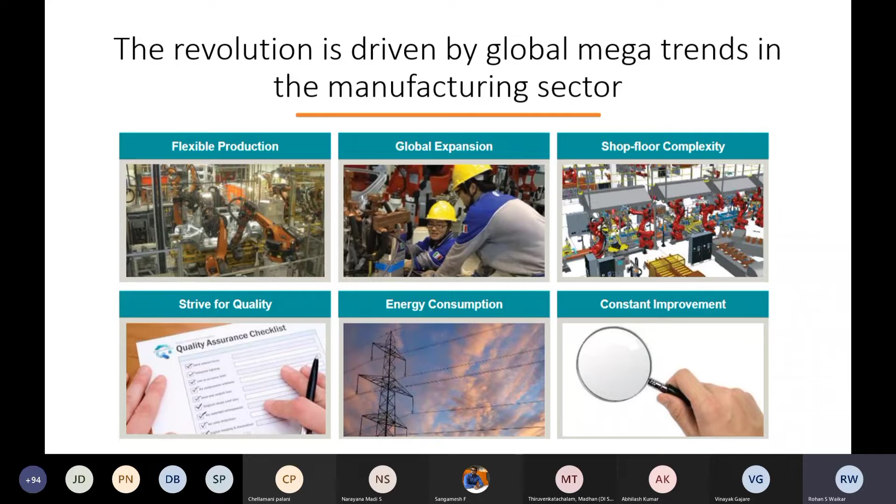Process Simulate is an excellent platform to build the production digital twin of a manufacturing system. In the next couple of slides, I will be taking you through the capabilities of Process Simulate, which will help us evolve a plan in the mind to a proper digital twin of a production line.

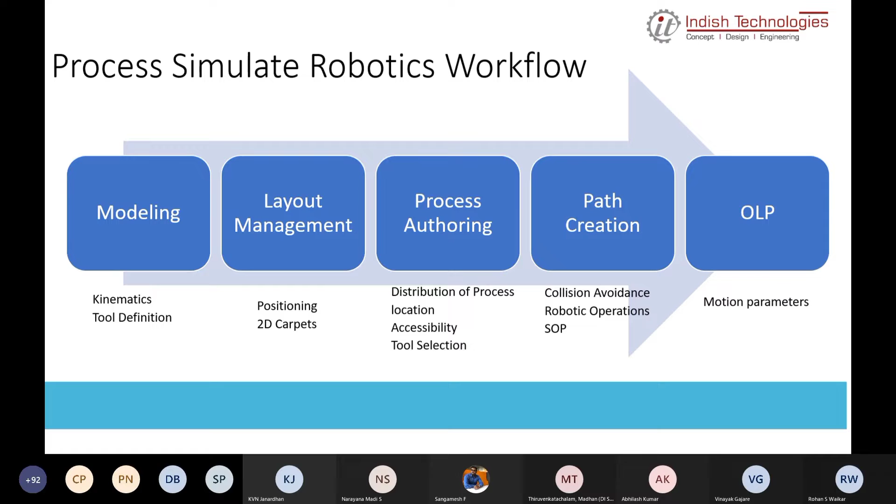This is the workflow of building a twin. The first step is to gather the data required, that is machine and process elements. Convert the 3D model into a dynamic kinematic model, followed by arranging all the equipment of the process based on the feasibility study. Manufacturing features are published and managed based on the process, followed by the path creation and OLP path. Let's take a detailed insight into the first portion, that is modeling.

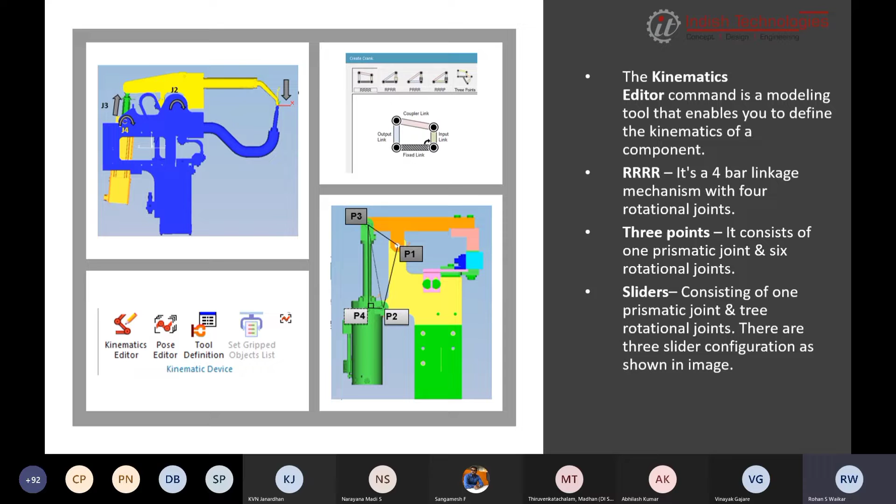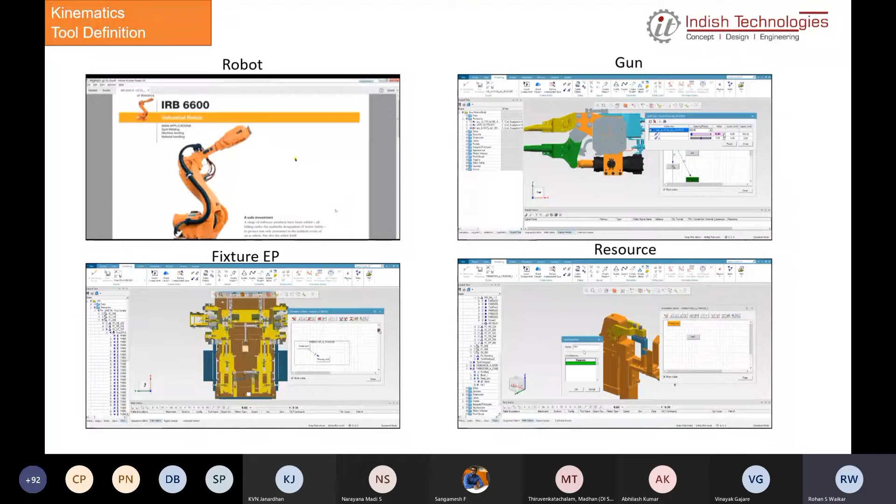In this slide, you will see different mechanisms modeled in Process Simulate. Flexible and complete modeling in Process Simulate helps the user to build an efficient digital twin.

Let's move to the next topic, that is layout management. It is essential to have an easy platform for data transfer between different engineering applications. Process Simulate offers a wide range of 2D and 3D modeling commands that help the effective management of layout. In this slide, you see some examples of layouts created and managed in Process Simulate for reference.

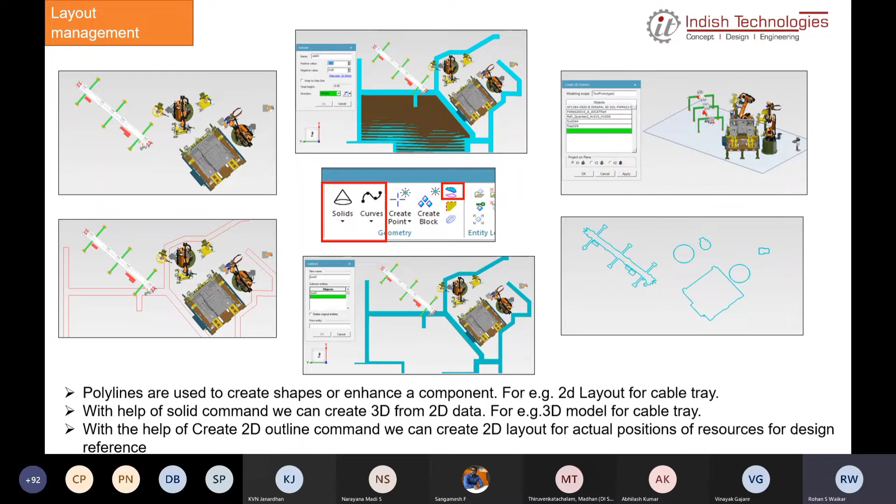Moving on to the next topic. Mainly, we will see the two most common welding types used in the automotive industry. The first one is spot welding. Spot welding is a widely used joining technique in the automotive and its allied industries. Process Simulate offers a complete platform to author, manage, and analyze resistance spot welding features.

The process of spot import from an external data source like Excel is easy and direct. The different tools shown below help the user to import the spot data, assign them to the stack of parts, project them to the normal of the welding surface, analyze gun parameters, and finally arrive at the optimal gun design for a weld.

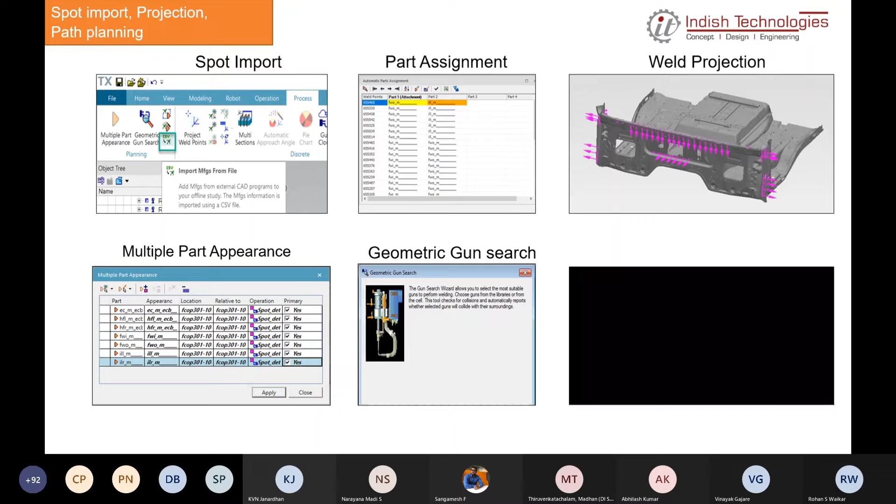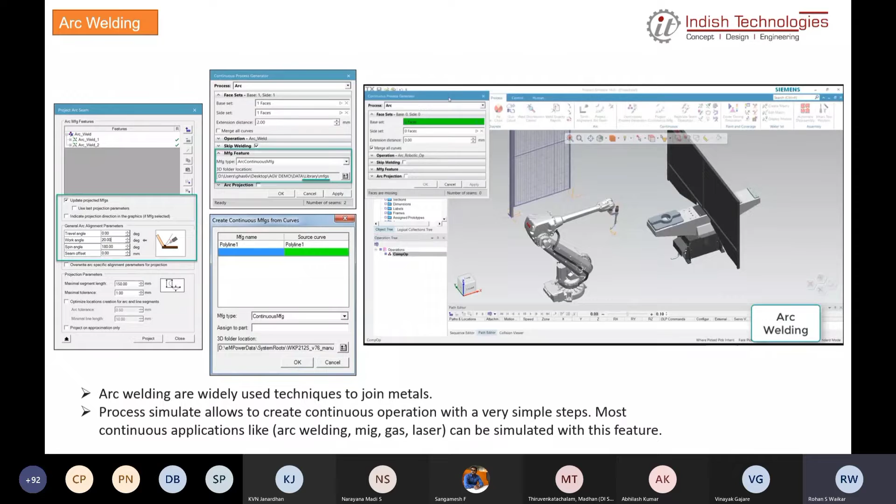The second one is arc welding. Arc welding is one of the many fusion welding processes used to join metals. It is widely used in the 2 and 3-wheeler automotive industry. Process Simulate offers a complete solution for arc welding features. Most continuous applications like arc welding, MIG welding, gas, and laser, etc. can be simulated with this feature.

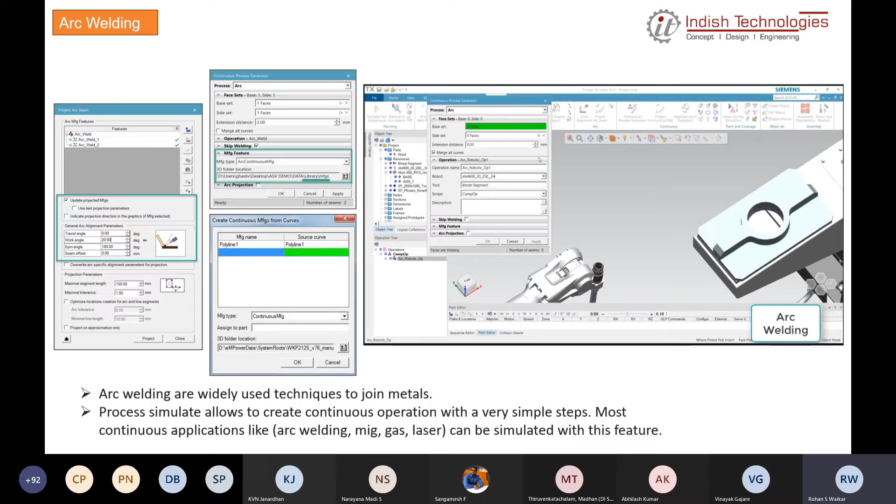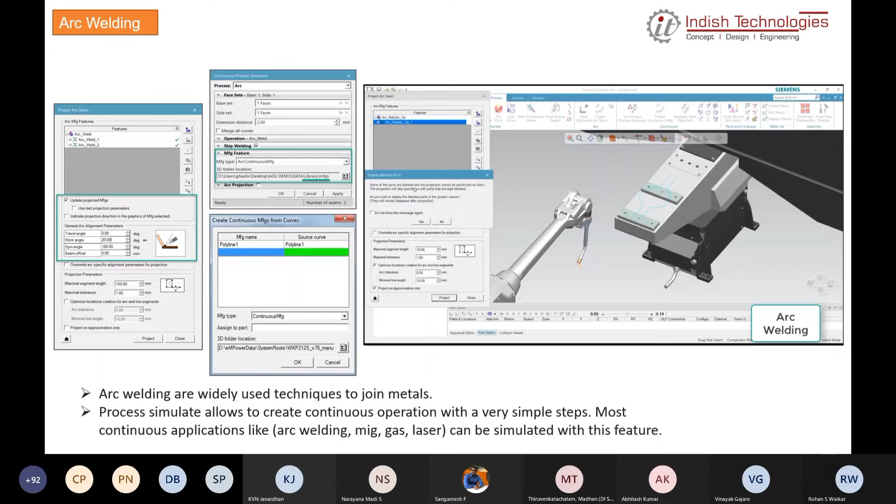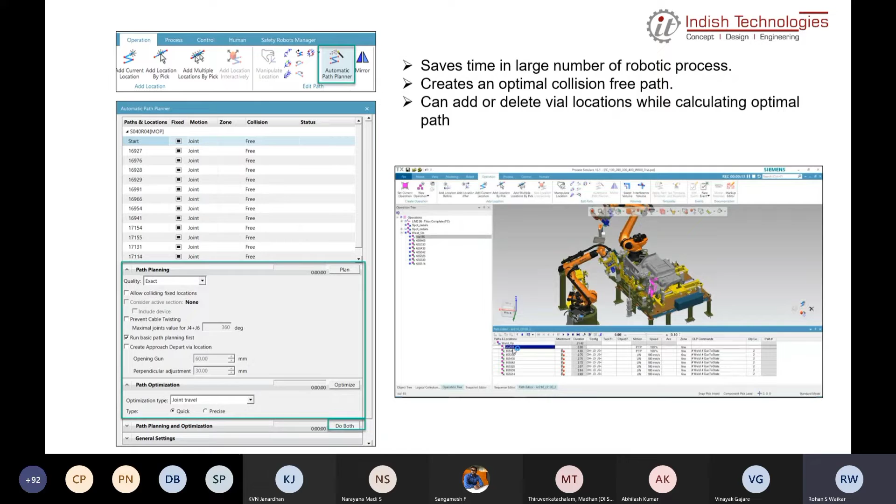Let us move to the next topic of the day, that is automatic path planner. When a large number of robots are employed in the process, robot path creation becomes a cumbersome activity. To overcome the challenge, Process Simulate offers automatic path planning as an option which helps the user to create optimized paths automatically.

This command automatically calculates and creates an optimal collision-free path for weld operations, pick and place operations, and many more. While calculating the optimal path, the automatic path planner may add or delete via points.

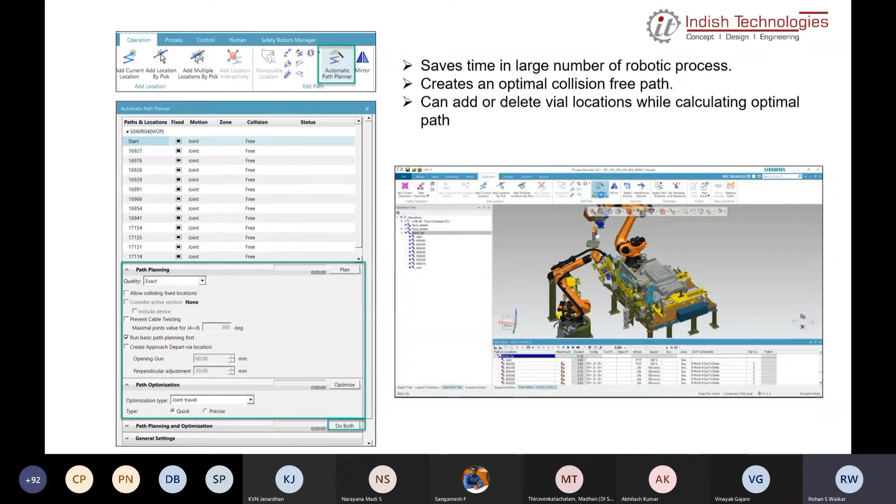Moving further, we will discuss path templates. A robot program contains a vast amount of information on the process and location parameters. It is often necessary to configure the location parameters, for example, tool, speed, zone, etc., to define a path for a specific process such as spot welding, arc welding, and many more.

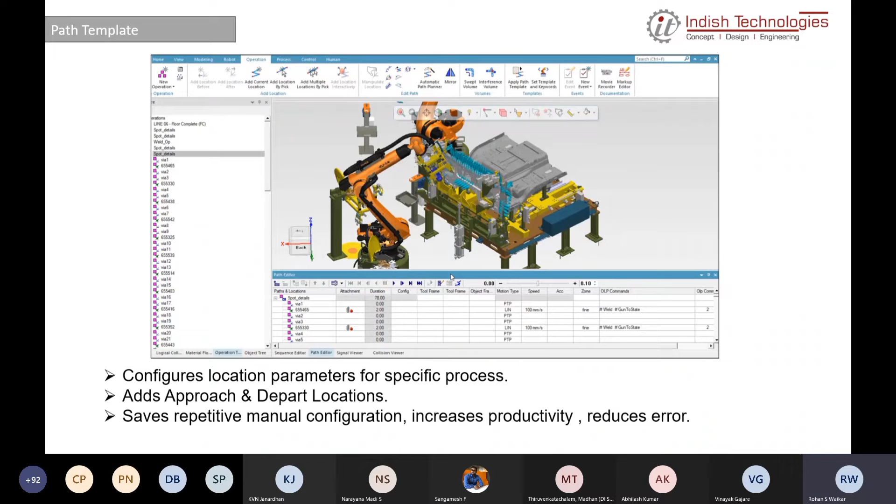Process Simulate enables you to define actions in an XML template and apply the actions to multiple operations. You can set the parameters and OLP commands for the operation and for locations. And also you can add approach and depart via locations and set their coordinates. You can define many actions in an XML template and apply them with a single click, saving repetitive manual configuration, increasing productivity, and reducing errors. Now let us see an example of an XML template.

In this example, you can see we have written a program for adding approach and depart locations, which will be created at -10 in the Z direction. Also, for this point, we have defined the motion parameter as PTP. In such a way, we can define most of the parameters for weld locations as well.

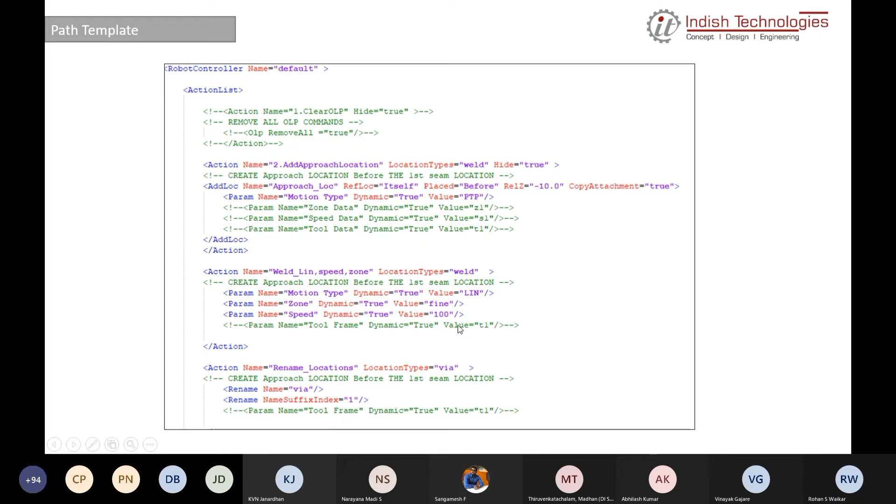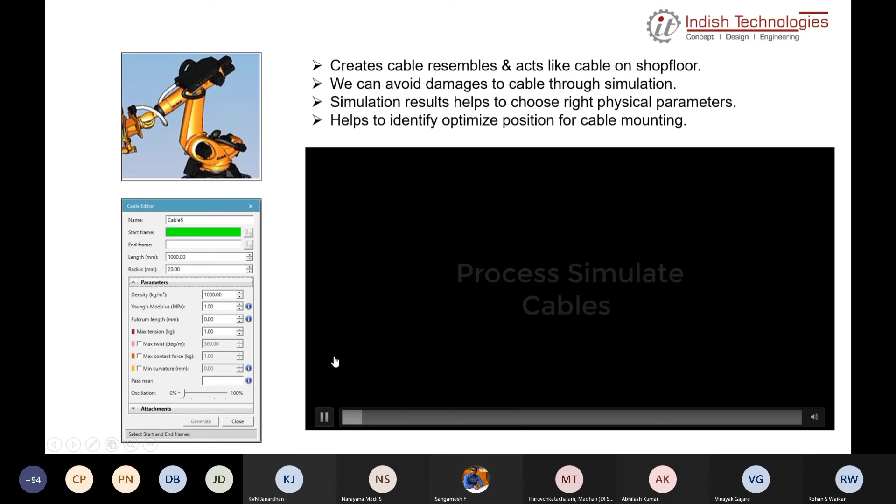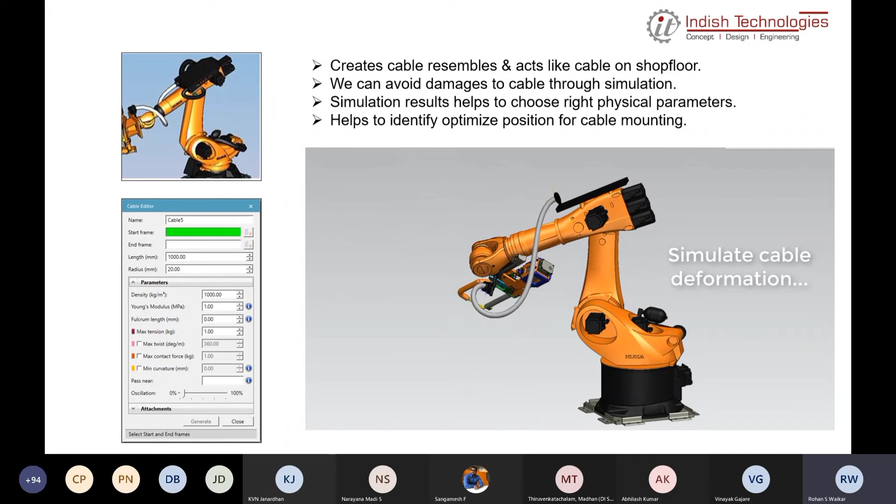The next topic is robot cable. Robots are often equipped with external cables routed along the robot body. It is necessary to take cables into account when running the simulation to avoid damaging them. Process Simulate offers an excellent tool to simulate the dynamic behavior of these cables. You can configure cable parameters so that the simulated cable resembles and acts like a cable on your shop floor robots.

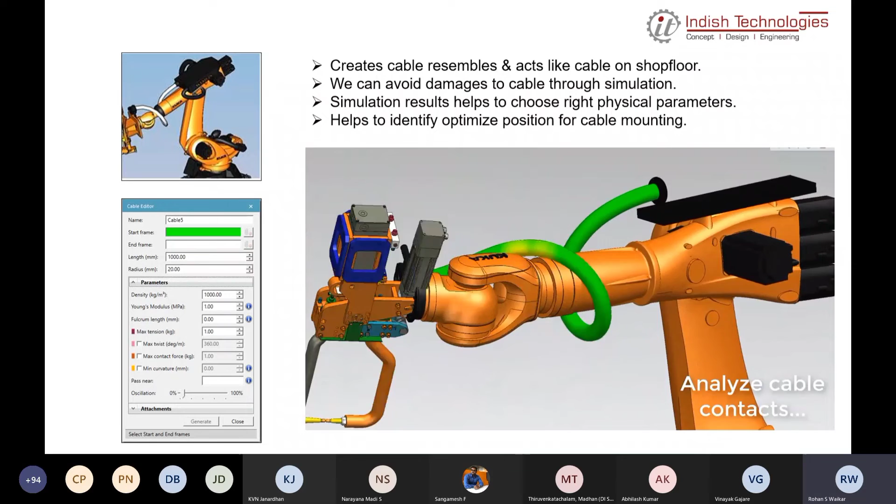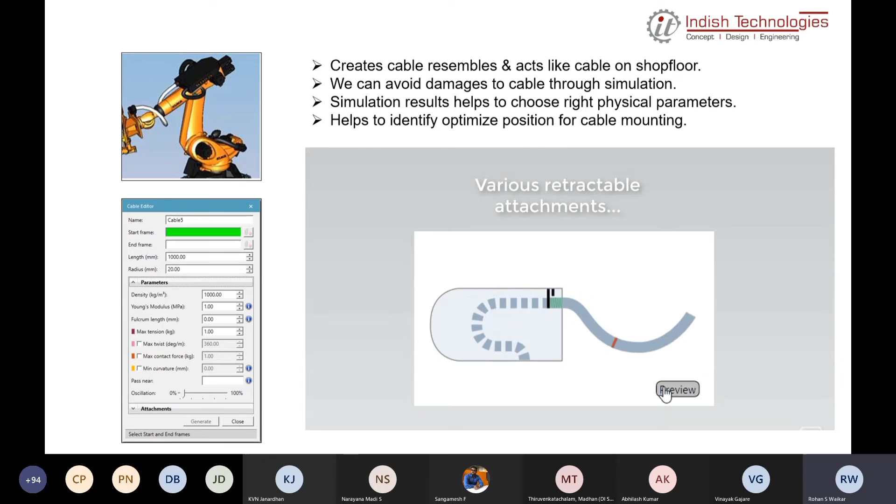The simulation results help us to choose the right physical parameters of the cable and help the user to position the cable mount in an optimized position. The user can be sure of cable mounting on the shop floor, avoiding any surprises on site.

Moving on to the next topic, OLP. Working with different robots and offline programming with different robots is a simplified task in Process Simulate. You can choose the type of controller, set the RCS version, and choose to run the simulation in different motion modes before downloading the OLP program.

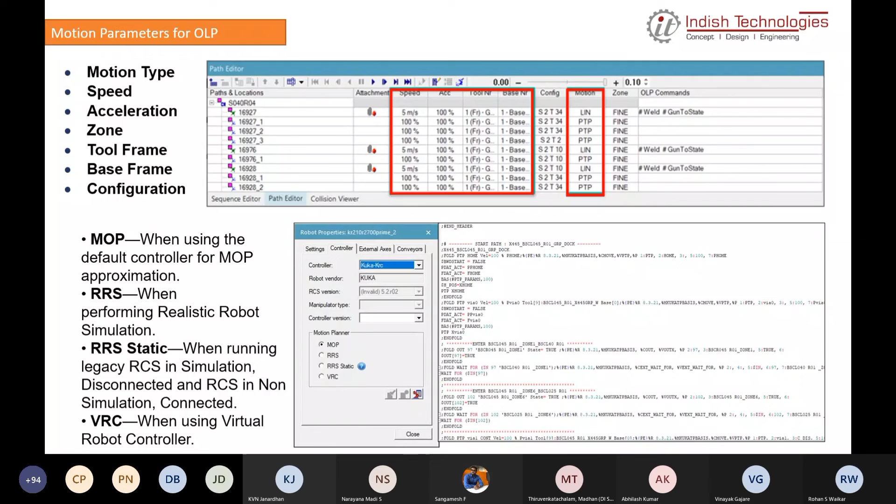Moving on to the next topic, robot safety. Robots are one of the most important components of any automatic manufacturing system. They are capable of performing various tasks reliably and quickly, while posing a danger to people working in their vicinity. Often fences are used to keep the robots separate from workers and avoid any harm.

Robot safety is a way to describe the surrounding environment to the robot so it can safely operate in it without causing any harm. In most robot systems today, safety is described to the robot via the definition of various geometries relative to the robot's own base, allowing the robot to take them into consideration using mathematical calculations handled in the robot controller prior to or during the motion.

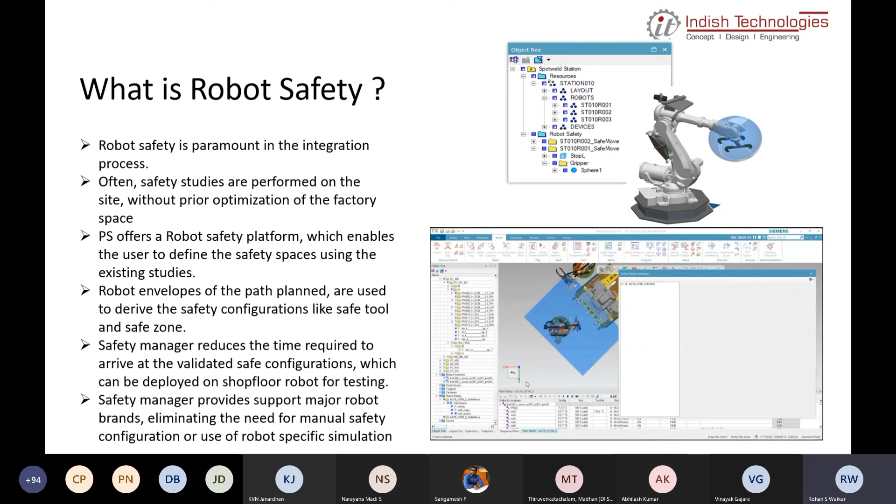Now, moving to the next topic, our expert Mr. Jitin will take you through the virtual commissioning part.